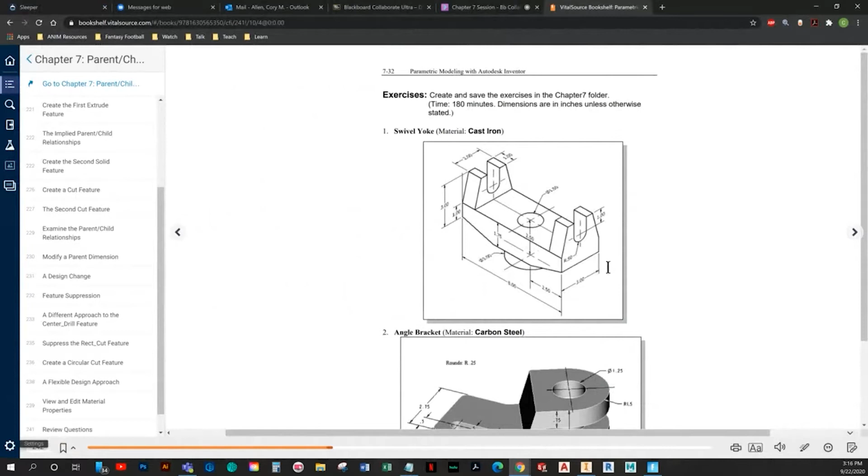Well, hello. So today we're going to draw Chapter 7's end of book exercises. Let's get into it. We'll draw the swivel yoke first.

And that's going to be in inches. So I'm going to start a new template.

And we're going to try to draw so that when we're done, our part's going to be oriented the same way. So I'm going to draw this profile here on the front plane so that we're looking at it just like in a book.

And as I always do, I'm just going to draw the size and shape roughly, and then we'll go back and get everything located right.

Now, if you notice, I'm making sure to imply perpendiculars, horizontals, etc. And I'm going to make sure this is vertically aligned as well. It saves a little time later.

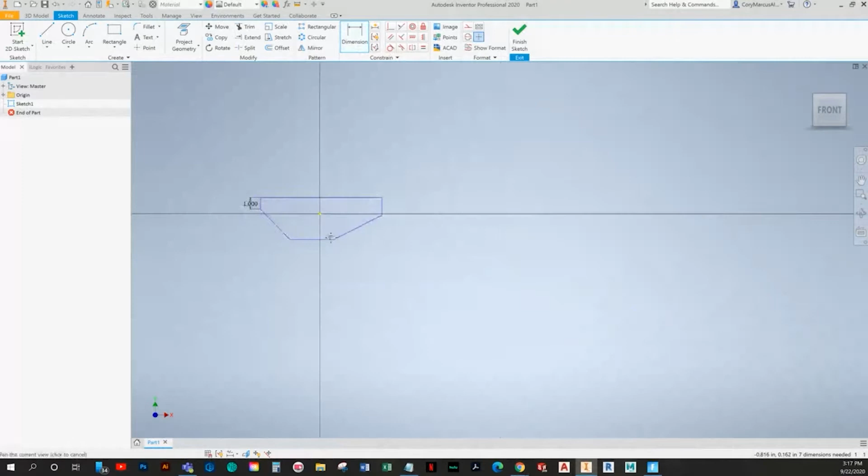It's 1 inch. I'm going to say that this one equals this one, so I don't have to bother putting in another dimension.

And 1.75 tall. We'll set this line to equal this one because I don't believe it had a dimension there.

Let's see. Let's put this part right here, the top of it, coincident to the origin point. Take the midpoint of it. Yep, there it is. And make it coincident.

Alright, let's see what else we need here. Okay, so it has to have a width. Yeah, 2.5. Okay.

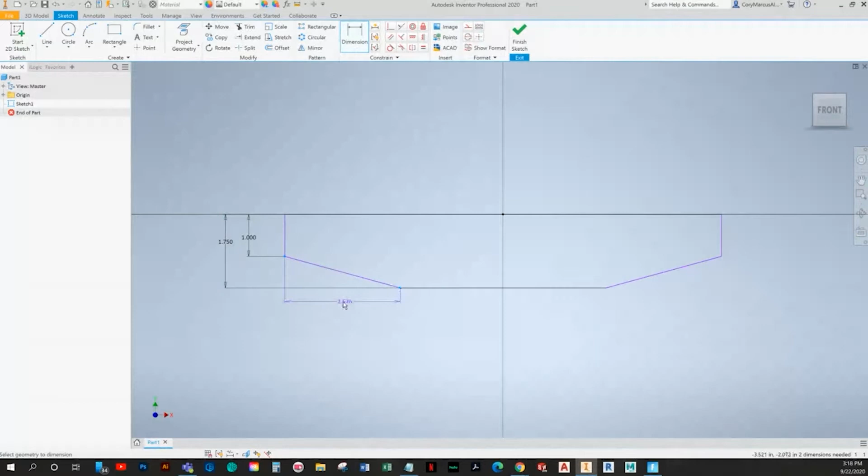And let's see, we're still missing something. An overall width, naturally. Alright, so it is going to be 3 deep.

And let's try drawing one of these features and then we'll mirror the other one. That way we don't have to do it twice.

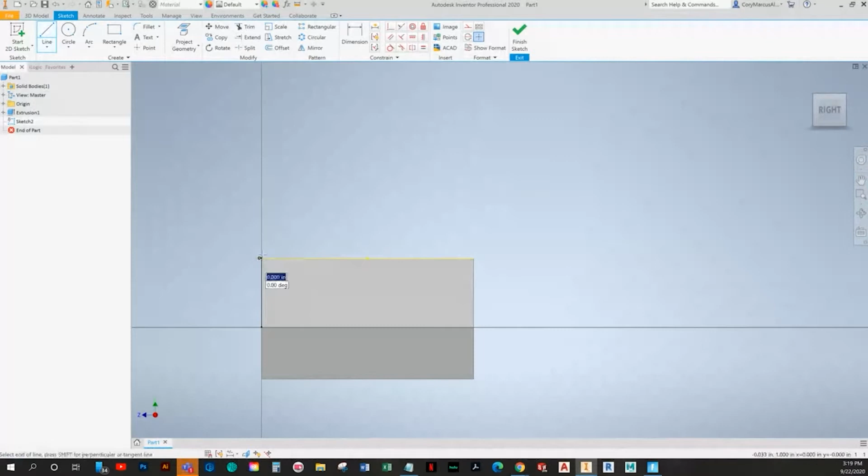I'm going to draw the rough shape. Oops, I'll try to hit the edges too. And for now I'm just going to draw a little rectangle. I'll put the round part in a second.

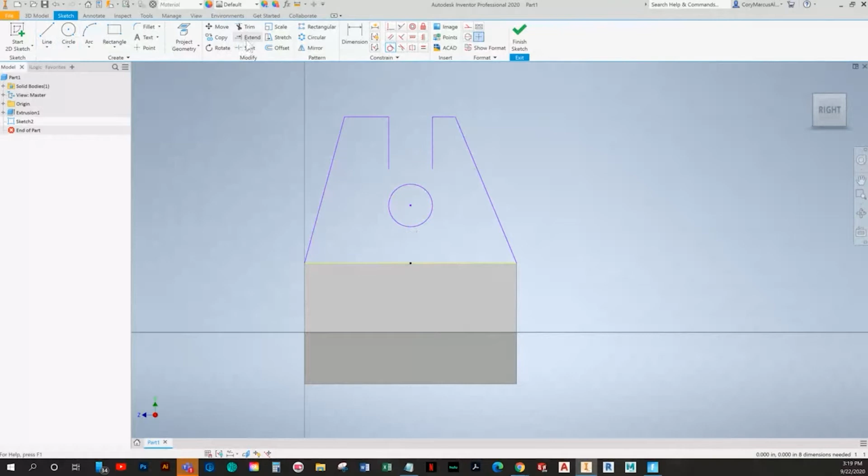Okay, so we'll make that vertically aligned to the center point. Make this tangent. And extend it. Trim.

So we know that this line and this line are equal. We also know that this one and this one are equal. And it is, I believe it was 1. Yeah, 1.

Radius of 0.5. And 2 wide up top.

Let's see, we're missing the overall height still. So it's 3 to this edge here. So we're going to project that edge.

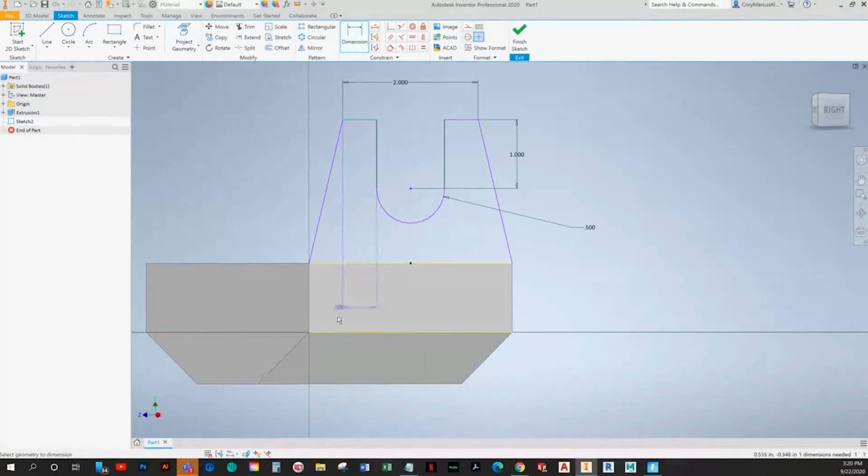And extrude it. And it's going to be 1.

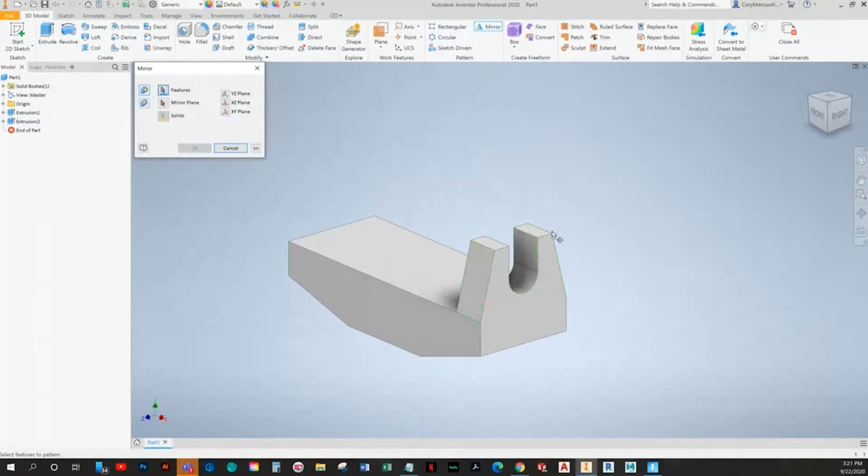Alright, so instead of drawing that same thing again, we're going to use the mirror tool, and I'll choose this existing feature, and then for mirror plane I'm going to choose this middle.

So obviously if you were not conscious in that first sketch to make sure your part was centered here, you wouldn't be able to use that plane, because the way a mirror works is it offsets to exactly the distance from that plane to this feature.

So if you're having problems, that's probably your issue.

And then we've got a hole of 1.5. And you know, instead of doing it like that on the face, I guess I could have used this plane since I made it conveniently in the right location before.

And I think it was 1.5. Yeah.

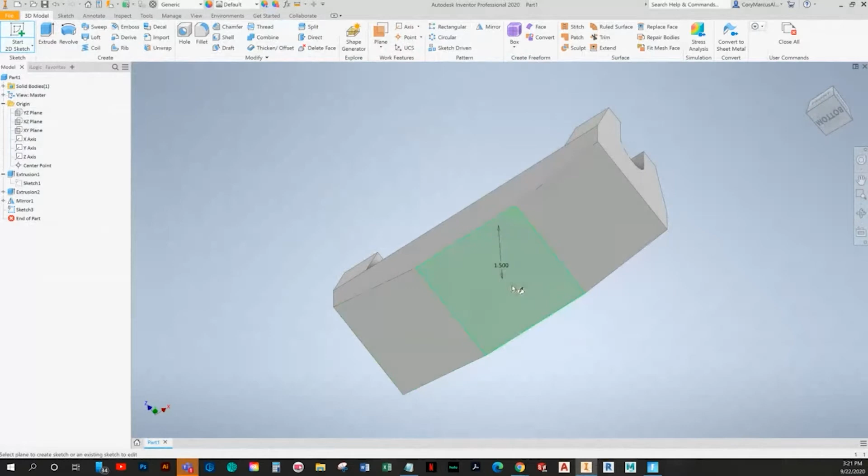And you know, I probably should have done the bottom circle first, so we're gonna jump over to that real quick. And it's 3.5.

And I'm just gonna move the sketch below it, that way I can extrude it all in one go. Okay, so...

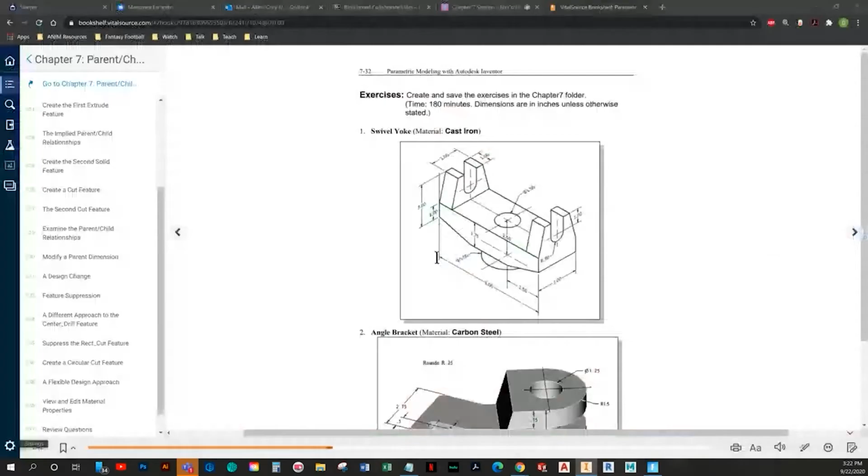It's 2.5 from the top of that face to the bottom, but I drew it from the bottom, so I'm gonna have to subtract 2.5 and 1.75, which is 0.75.

And then I'll take that other sketch and just do a through all cut. And there we go. Make sure that you change your material to cast iron.

It's called iron cast in this case. And there you have it.

Okay, so the next one is the angle bracket. It's also inches. And we'll do the top view first.

Be conscious of this view cube. A lot of times it rotates, but we're going to try to always make everything the same position that it's shown in the book.

Alright, so this one's a little trickier. I think I'm just going to draw it out in space and then I'll move it in position when I'm happy with it.

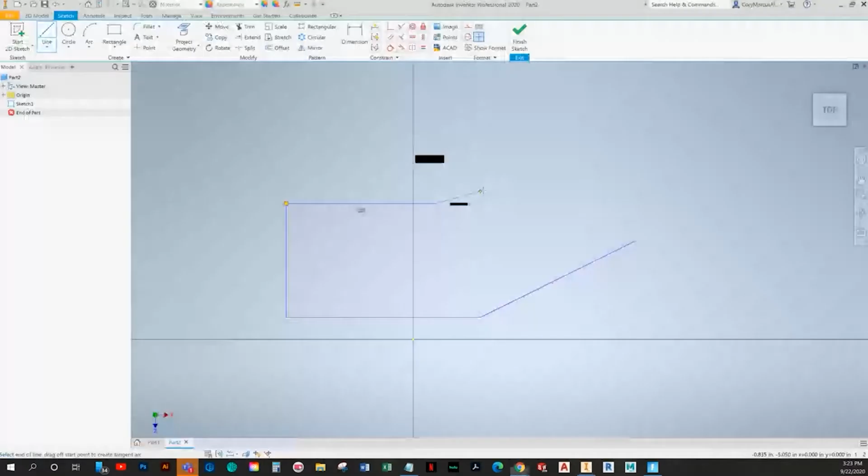Now looking at it, it appears that these edges are perpendicular, and same with these. So I'm just going to draw the box shape over here, and then we know that this line is parallel to that line. So I'll just put it here for now.

Let's say they're parallel. Draw a circle.

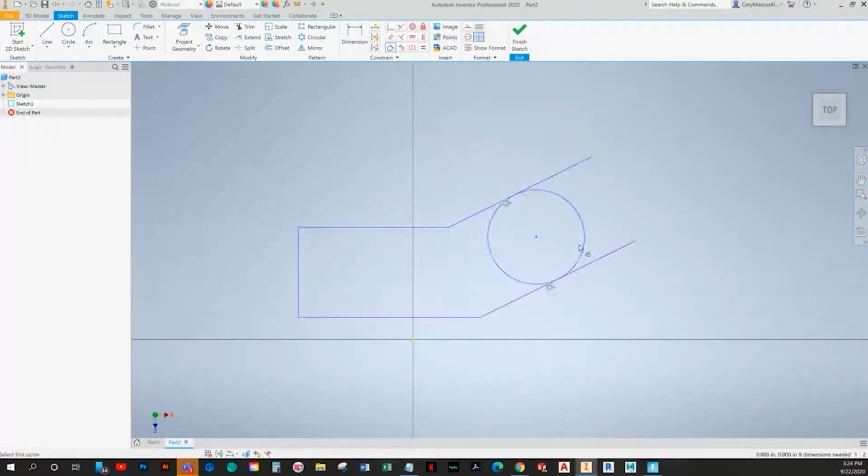And make it all line up nice and pretty. Okay, so this edge should be 3... it's 2.75 here. I'll draw the slot in a minute. It's 2.5 to the circle edge. Make sure this is a line dimension.

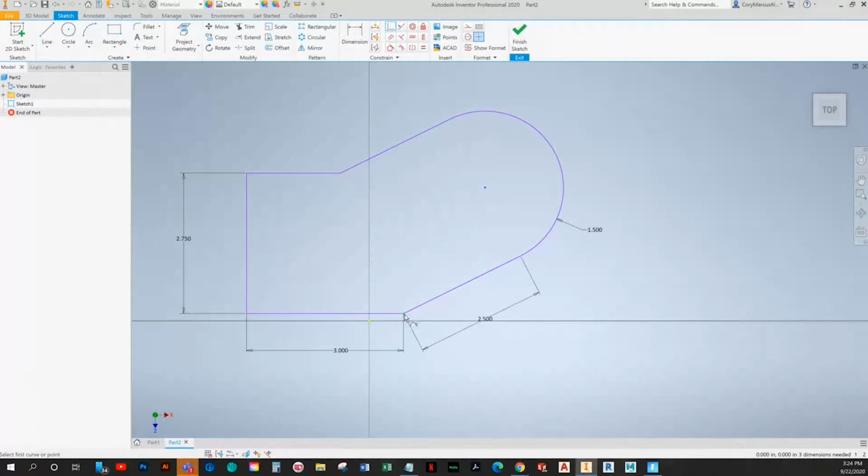1.5. That may be it. I don't feel like there's a great place position-wise to put this, so I'm just going to put a random point on a sketch on the origin, and that's fine. It's not great, but okay. And there's a 30-degree angle we need.

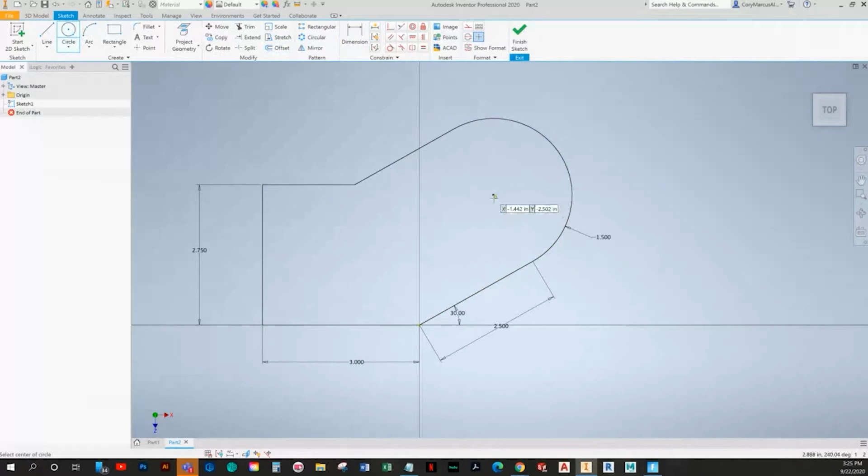All right, so we still need a circle hole, and I'm just going to draw a fresh one actually. 0.75 thick. And I'm going to draw on this face, that way we're aligned to the view. I'm going to project this edge, and I'll project the top edge too. There we go.

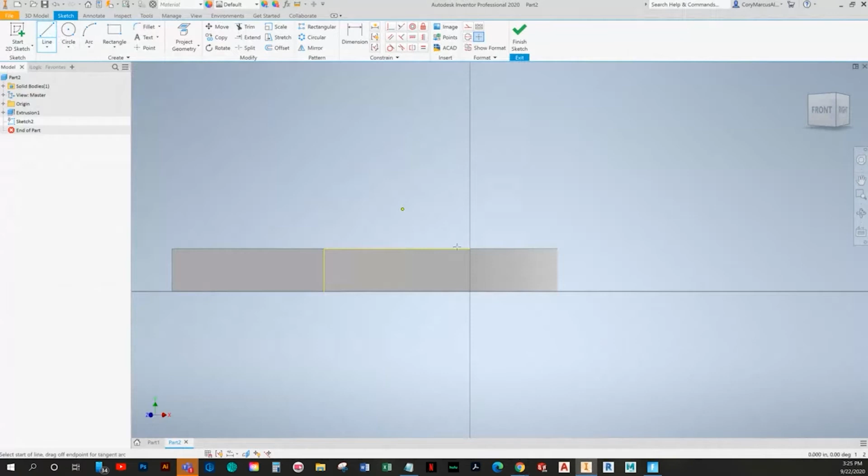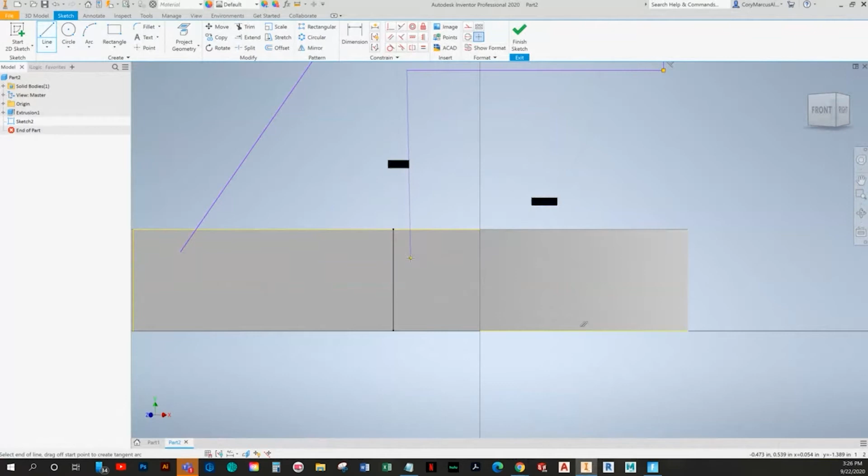Okay, so what we have is roughly a shape kind of like this. And I will go back later and have to cut out the circular profile, but it's kind of hard to get this angle right if you go the other way. Okay, and it just comes straight down, it appears. Hate when it does that. That's okay. Alright, I'm going to trim these.

And let's slap in some dimensions. Whoops, I dimensioned to the wrong spot. Okay, so from here to here is 1.5, and then from here to here is 0.75. It's 75 degrees.

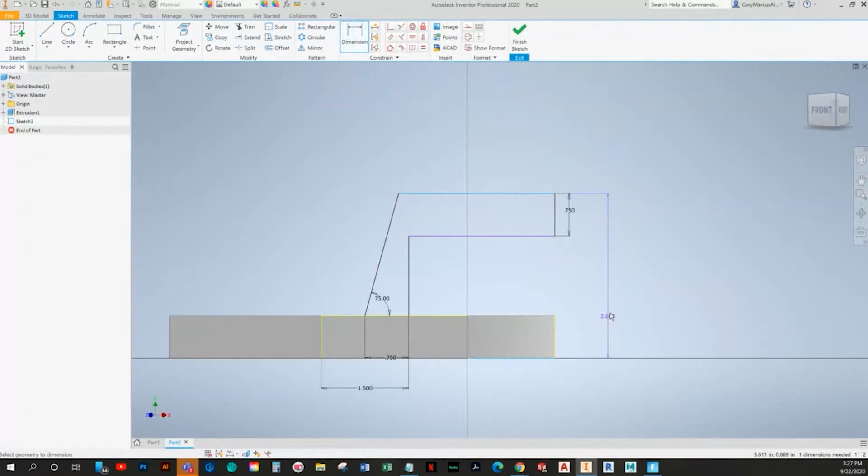I could set this to equal the other one, project that edge and do that, but that's okay, I'm just going to roll with it like this. I'm still going to project that edge though, to make this one collinear to that one. And then our overall height is 2.25. There we go, that looks more like it.

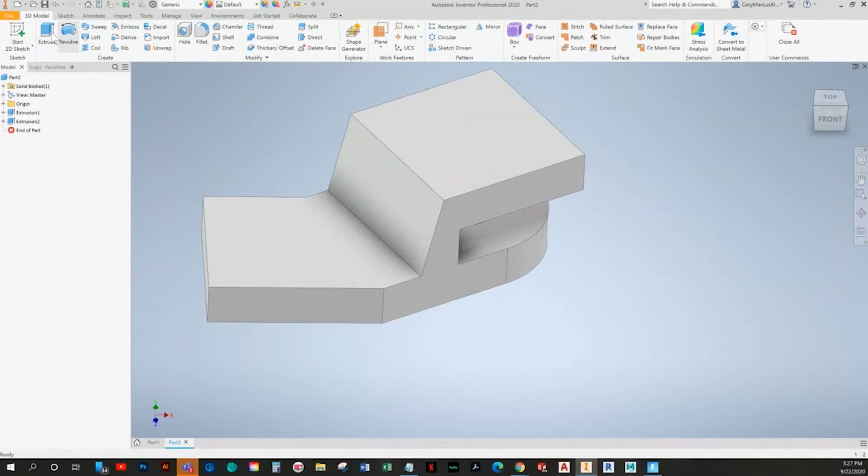Okay, and instead of trying to put in the number, I'm just going to choose 2 and choose the other face. So now it looks more like the actual shape we're looking for. And for the sake of being lazy, I'm actually just going to project these edges.

And in doing so, I can actually just extrude cut without having to choose anything. Oh, but I do need to project the edges of my square still. There we go. Alright, so now I can do a 2 and go to the other end of the face, that's this one right here. And that might be it.

Let's take a look. Oh, I need fillets in the slot still. I take that back. Okay, so we have rounds of 0.25. Well, let's go ahead and do the slot first, actually.

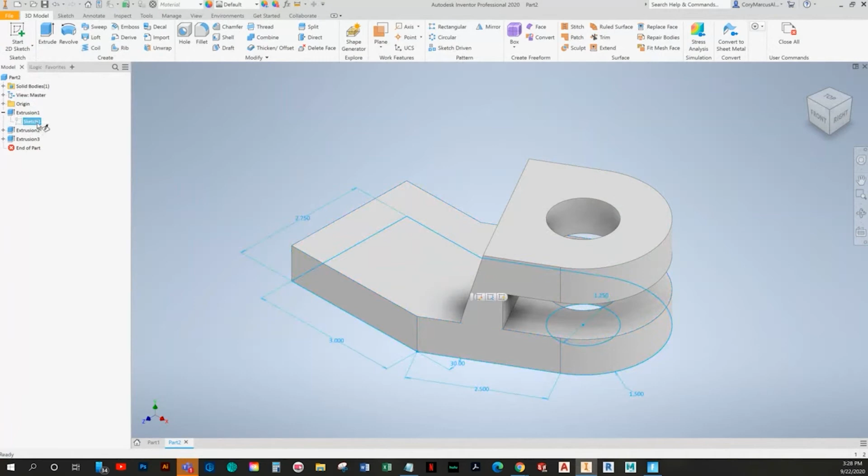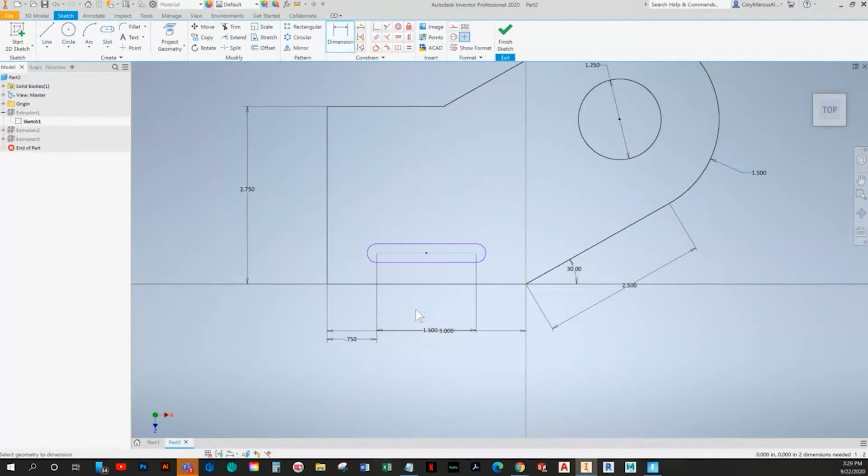I could have done it on the original face. I'm going to go back and add it there, actually. Let's see, where is the slot button? There we go. Okay, so 0.75, 1.5, and 0.5.

Well, there's another 0.5 as well. Alright, I'm just going to shift these dimensions around, get them a little more tidy. I'm sure you noticed they just jumped the whole time I was doing that.

And you may be wondering why it is that I did not put the fillets in on this sketch. It's because it's just sloppy. We're going to do a feature for that.

So it's 0.25, and it appears to be these two edges. It may be this one, but it's so pixelated it's hard to tell. We'll leave that one as an up-to-you-to-choose part.

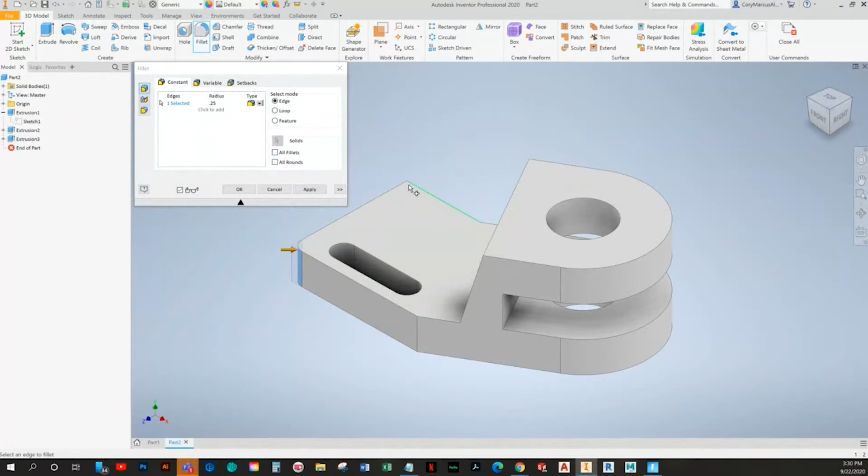Alright, and our material is carbon steel. There we go. And there you have it, the angle bracket.

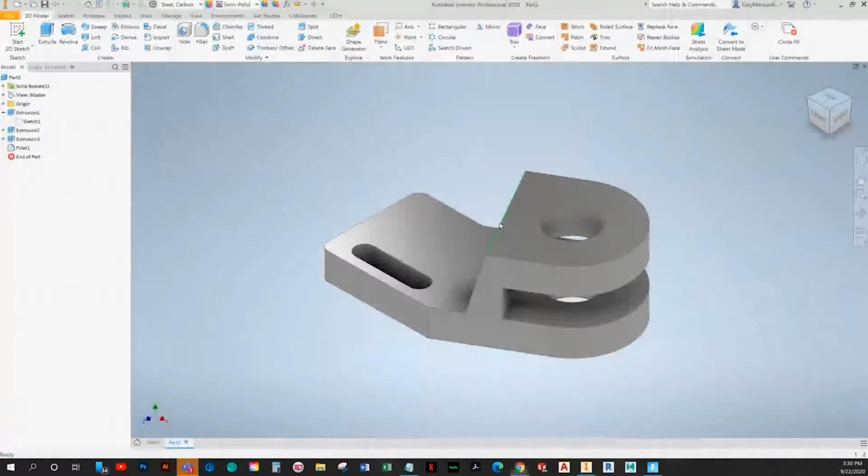Oh, this one looks fun. The connecting rod, it's inches. I mean, that's going to be a doozy, ain't it?

What I'm going to do is draw on the front plane, and I'm just going to draw everything. And then we'll minus these parts right here. And then we'll just extrude multiple times using the same sketch.

Because it appears that the intent is to have this rod attached to something, I'm going to use the center point as my origin location. And it's about 2 in size. I'm just going to go ahead and put in dimensions, and I'll trim and redimension them later, but I try to do things in a different way every time so you can see the different practices you can take.

Okay, and it's 6.5 from there. I'm going to ballpark that.

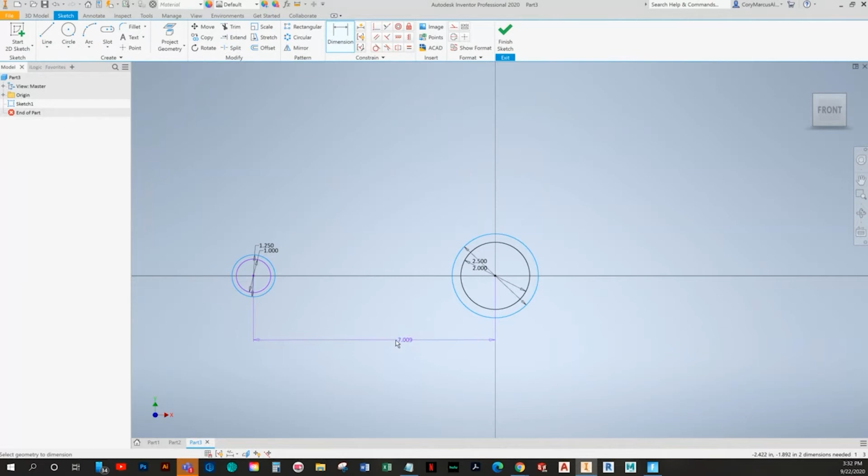Okay, I'm going to draw a temporary line. Well, I take that back. I'm not going to, it's fine. 6.5. I'm going to make these horizontally aligned.

So it's 3 between centers, but then it's 0.25 from there. So it's an overall height from this edge to this edge of 2.5, which conveniently means that it is tangent to this point of the circle because it's 2.5 diameter. So basically, I'm going to go ahead and draw some horizontal lines, make them tangent.

I'm going to go ahead and draw a line through the middle of this circle so I can trim it. When I do, it should delete these dimensions, but we'll see. It did not. That's okay. I'm going to go back and put radius ones just to make it match the book.

And I'm going to go ahead and draw these lines so that we can try to get that big old circle in there, the giant fillet. Technically, you could do a feature, but we're going to do a sketch one for this take. And that is 0.75. I'm going to dimension it to the circle so I can center it up.

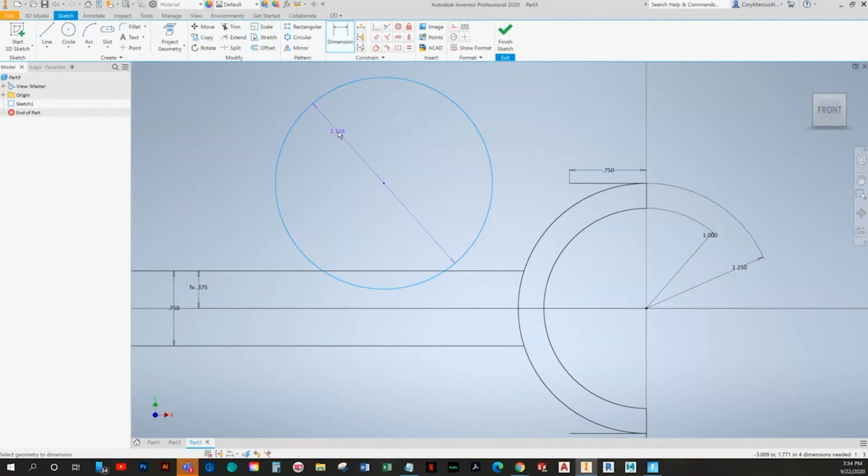It's a radius of 2. I'm going to set it to be tangent here and coincident here. Move this in so it's a little easier to see. And we'll do the same thing on the other side. We're just going to set it to equal this one.

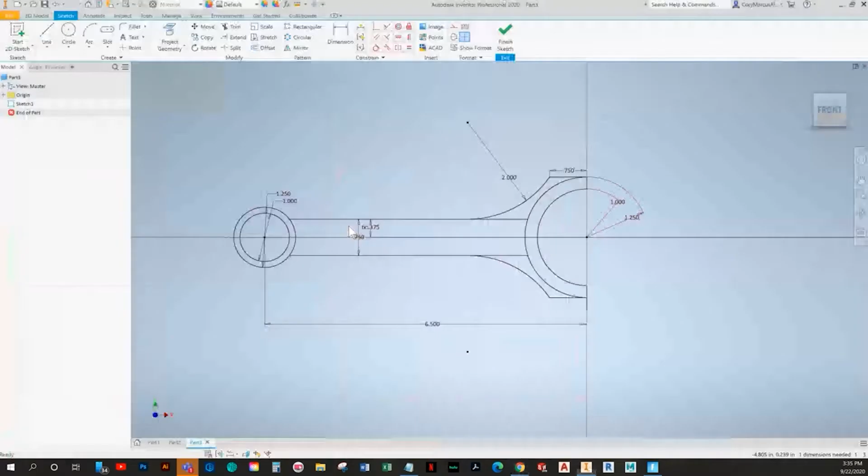Okay, so we still need this little cutout in the middle and these fillets. Well, these two fillets. So we'll do the fillets first. I'll set it to a radius dimension. Oop, I hit the wrong button. I believe it was 0.5. Yes.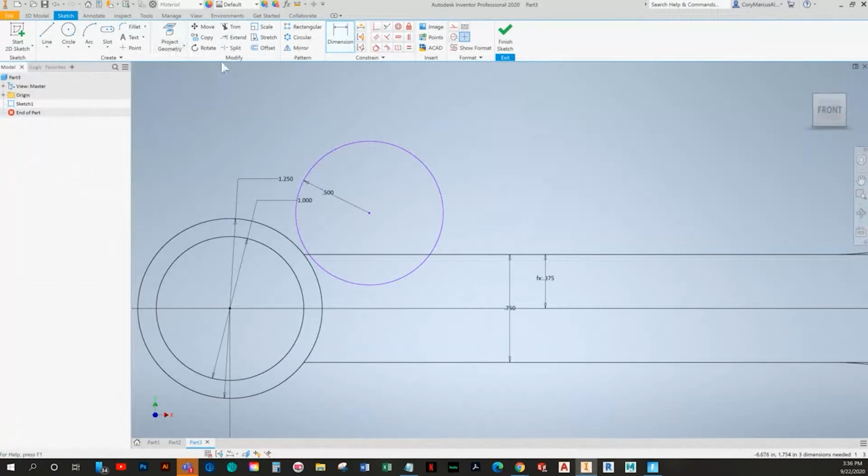I'm going to copy this one. And I'll set it to be tangent, tangent, tangent, tangent. Trim off these little edges. Trim these two, I believe. Yeah, and let's put the slot in.

So it's 0.75 by 3. And we'll make this center point horizontally aligned to that circle center so that we have it located properly. And let's see, it's 2 to here. All right, let's give it a shot and see if it comes out right.

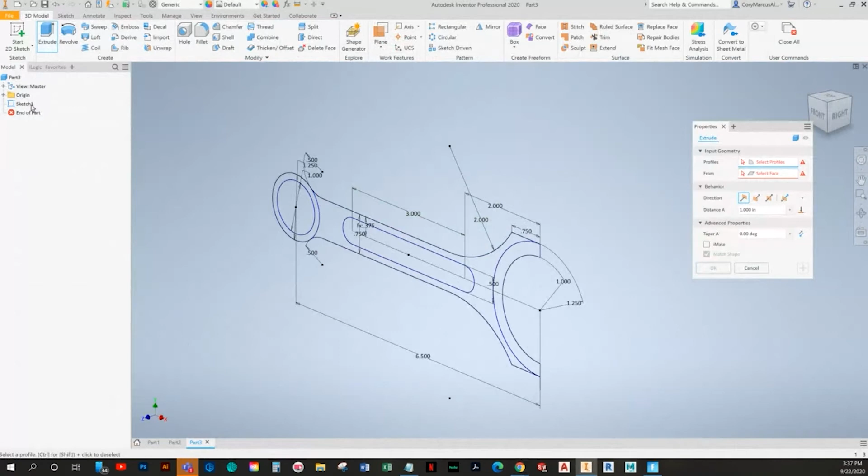I'd be lying if I said I drew these before. Oh, you know what? I have something not fully constrained. Let's see. What could it be? It's got to be a random line somewhere. Let's take a look at that.

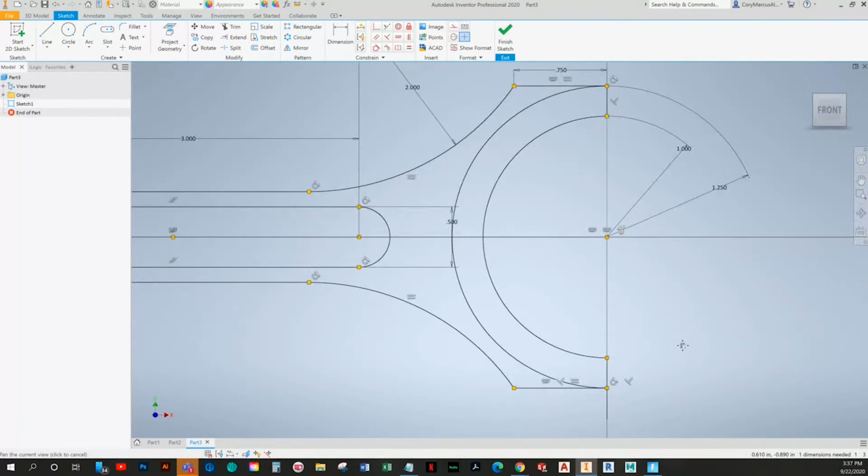Interesting. I'm going to set this one to equal this one while I'm here. But what is it? Oh, there it is. I'm just going to drag it in place. I didn't trim it on this side.

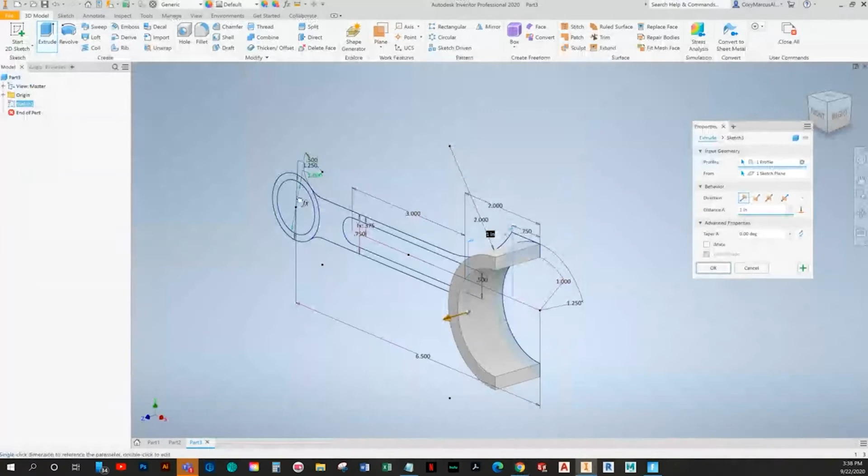Alright, so the overall width is 1 for the thickest part. I don't think there's anything else that's 1 here. Yeah, it appears this is 1 as well. Okay, so I'll grab these two shapes. Make it symmetrical for the sake of ease.

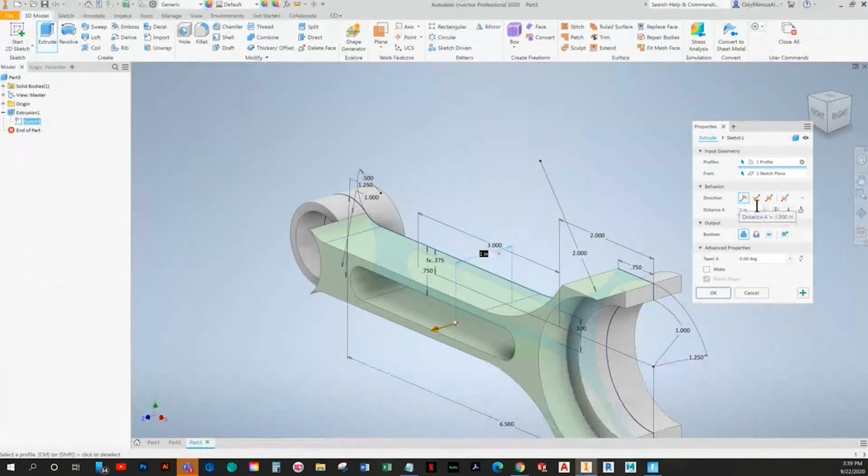Turn the sketch visibility on so you can reuse the sketch. And this part's 0.5 thick. Again, make sure it's symmetrical. Oh, I need to select that middle portion.

Alright, and then I need to have the overall thickness of 0.5 minus 0.125 for both sides. So I need it to be 0.25. Actually, I kind of goofed here. That's okay. So obviously I can't, because the slot's not all the way through, I can't reuse that geometry.

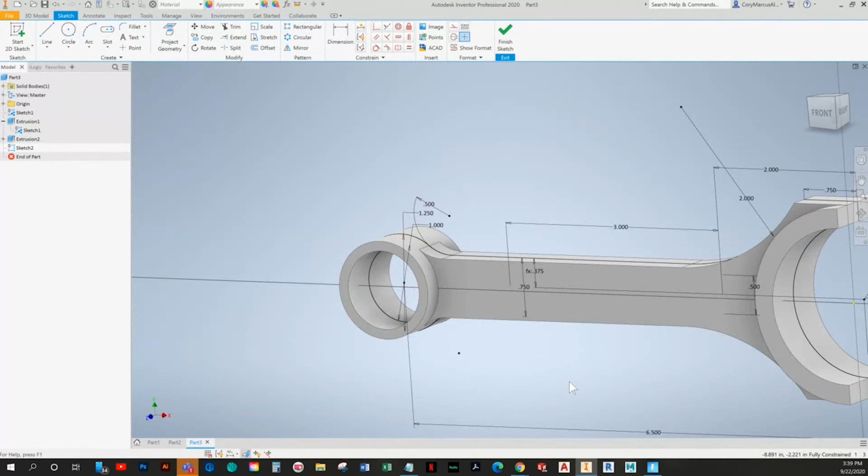So I'm actually just going to project that slot that I drew earlier, which unfortunately we can't see. So let's see if the slice graphics helps. No bueno. That's okay. I'll just go ahead and cut that out of the original just so we can keep it tidy.

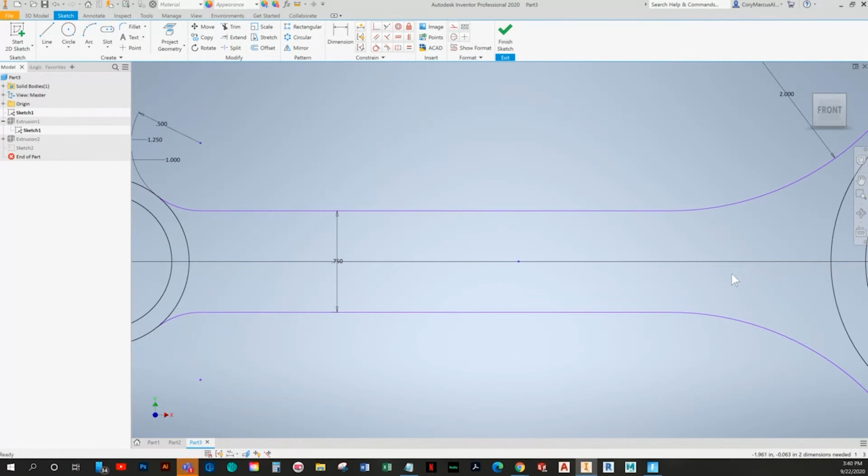I might have deleted something extra there. Let's look again. Let's just move this over here. There we go. Sometimes that happens.

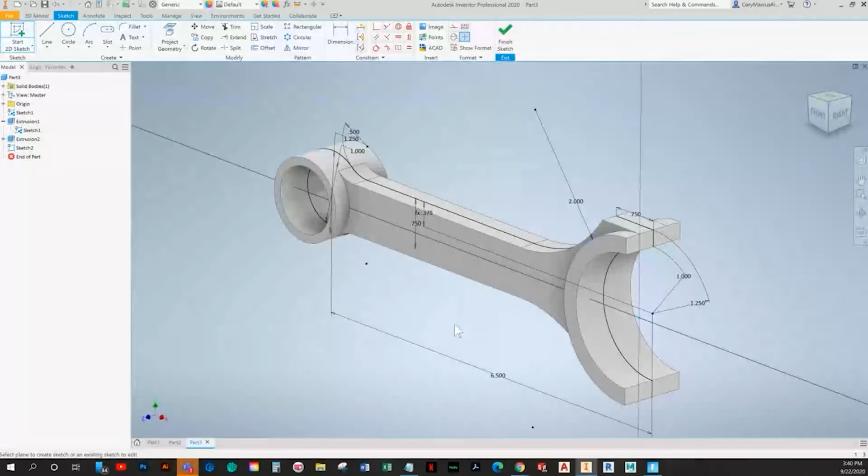Alright, so what we'll do instead is draw that profile and then we'll mirror it again, just like we did in the earlier exercise. Okay, so it was, I believe, 2 right here. Yep. Overall width of 3. Point 5 tall.

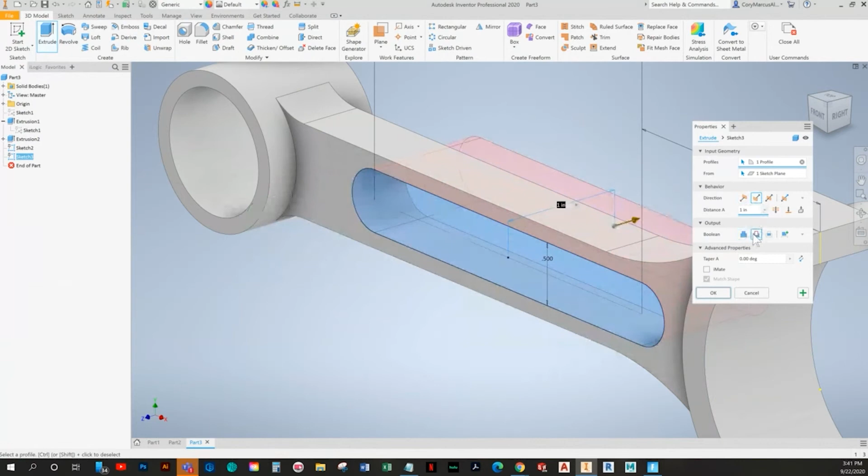Aligned to the center of the part. Okay, so I'm going to cut it 0.125 deep. Whoops, not through all. That's okay. And then I'm going to mirror that across what would be the front plane, XY.

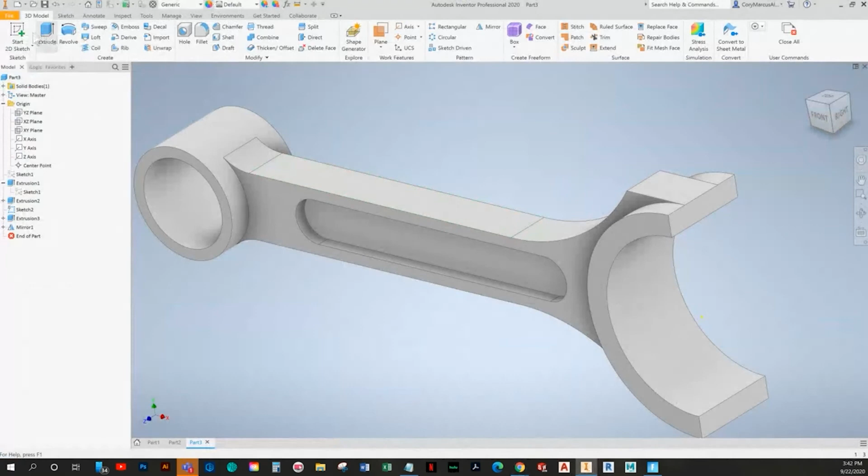And there's that. I think the only thing we need now is these little tabs. Let's make sure. So it would seem. Oh, wrong face. Okay, and ironically, I'm going to mirror it again too.

I'm not going to draw it down here. I'm just going to mirror it across the top plane. And it works smarter, not harder. Just going to draw some vertical lines and a circle. Trim off the excess. Make sure this edge is projected, of course.

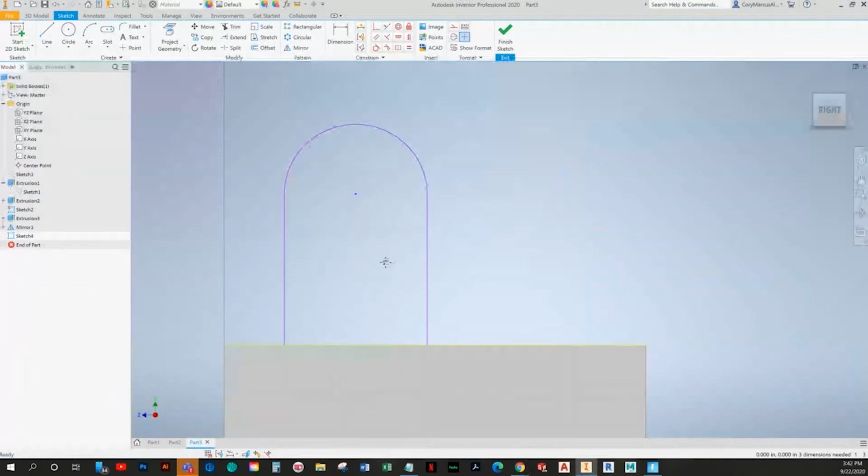It's 0.25 from here to here. It needs to be lined up vertically, the center point to the center of the part. It's a radius of 0.25 and a diameter of 0.25.

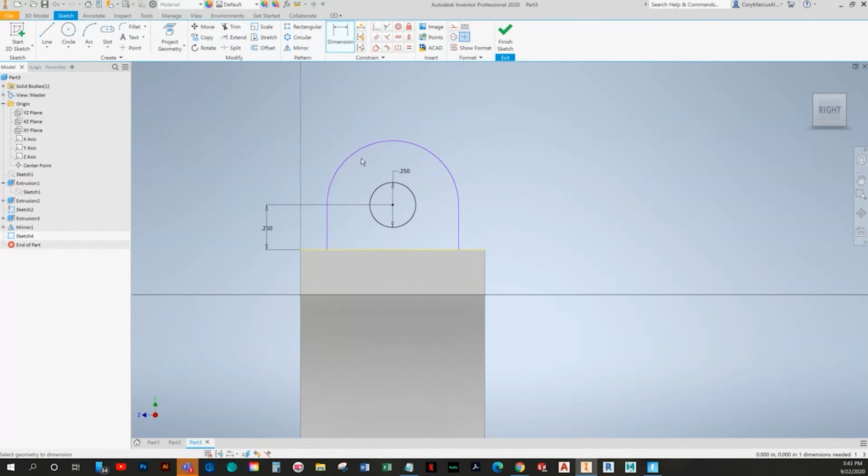It's 0.5. And then let's do another mirror to finish this up. I'm going to choose that feature, the top plane, and hit OK.

And the material is carbon steel. All right, the tube hanger. It's inches again.

Let's draw it on the right side, that way it's lined up. This is a terrible front view to be looking at this direction, but let's keep to the trueness of the book. And we're going to use the center point for our origin center because that's just a great option. Anytime you can put a circle in the middle, I bite at the bit for that.

Okay, so it's a diameter of 3, diameter of 4.

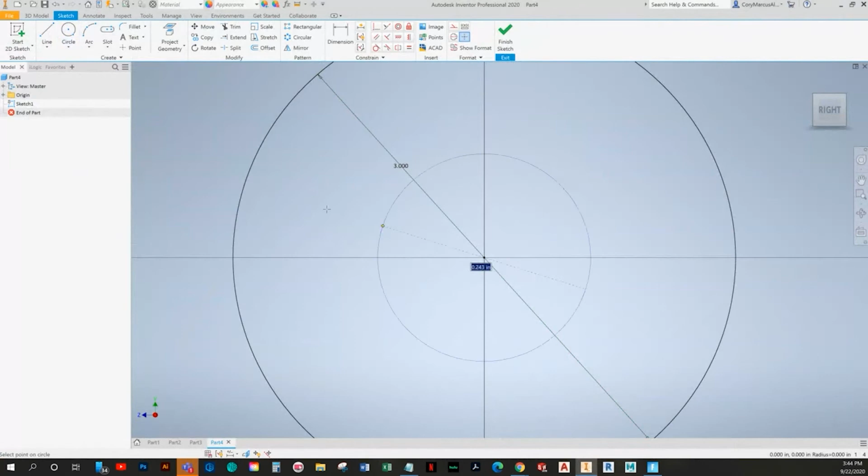Now this one, it's hard to tell, but that line, if you look at it, it's parallel to this line, and you know that this line's horizontal, so that lets you know that this bottom line is also horizontal. So we're going to draw a random horizontal line, and then I'm going to draw straight up, and then make a slant that I'm going to make tangent to the top.

So I'll get it kind of close to it. Alright, so tangent, tangent, tangent, tangent. Let's put a height in here, 2 times 1. Trim.

What am I looking for here? Oh, width. Okay, so 5 wide.

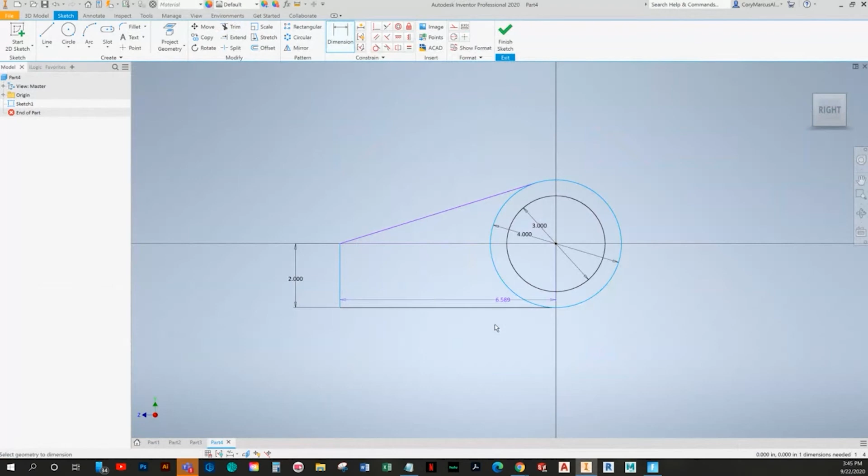Cool. Okay, so 1.5 both ways. I'm going to turn the sketch visibility back on so I can reuse it.

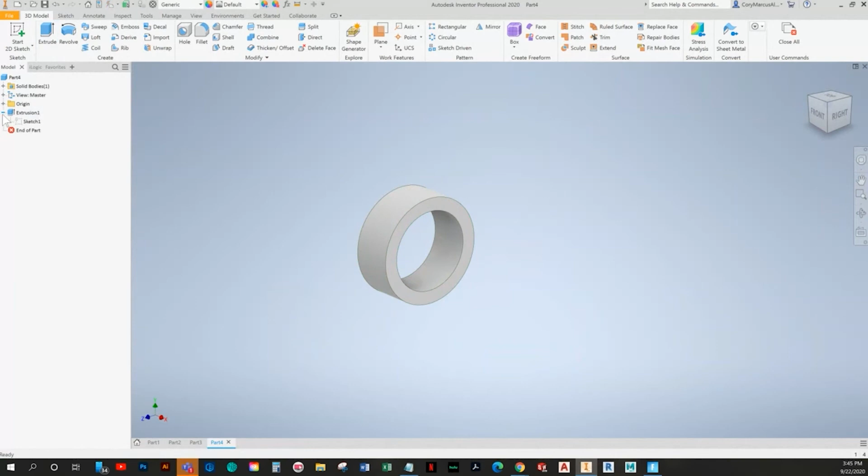I could also hit share sketch, but it's the same concept. What's the point? Okay, it's 0.75 thick here.

And I'm going to turn that sketch visibility back off so it's a little easier to see. Draw on this face here, and I'm going to go ahead and project the edges. I'll just click the face.

And it looks like we'll have pretty basic shape, just some more horizontal lines. If you don't want to snap to these edges, just choose to rotate the part and then draw.

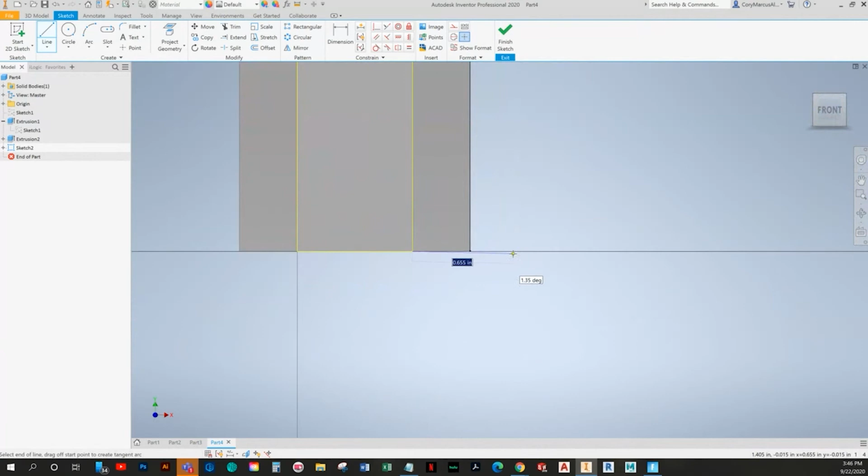Draw a circle, which is going to be tangent. We'll pull this line out a little bit so it's easier to trim. Same here.

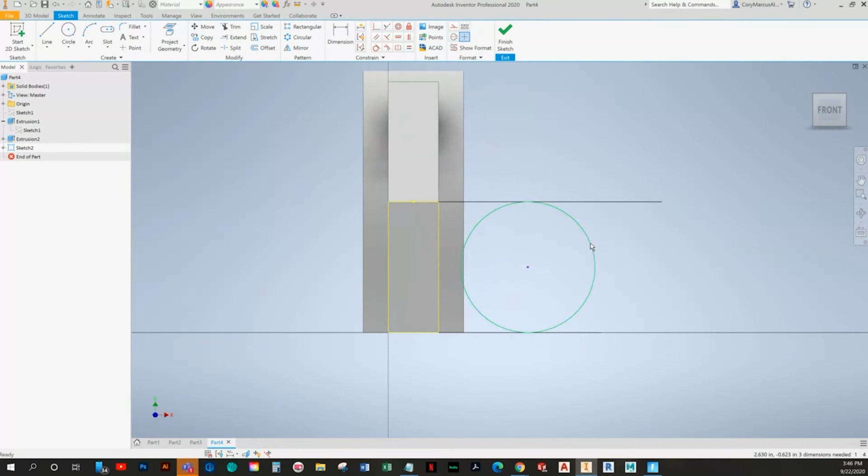Okay, and it's too wide from the outside. Whoop, bad clicks.

And you may notice I didn't have to put that R1. That's obviously because it's tangent on both ends, and you've already got a height given of 2.

All right, and then we're going to extrude it 1 deep, and then apply our material of aluminum 6061.

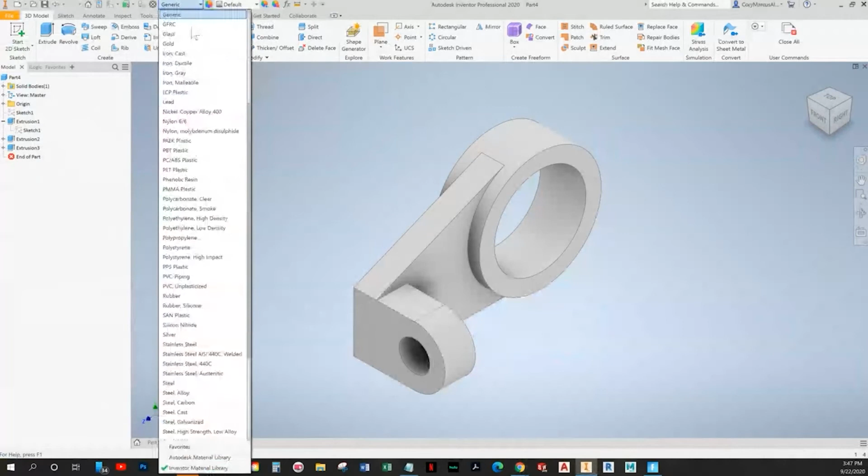All right, well, that's that guy. Here's the last 2. Millimeters.

We'll do a top view of this one. Rotate your cube when it inevitably rotates for no reason. And I'm going to draw this as vertical, so this will be tapered downward.

I believe, yeah, so we've got perpendicular corners for these 2 and these 2. Not very to scale, but you get the idea.

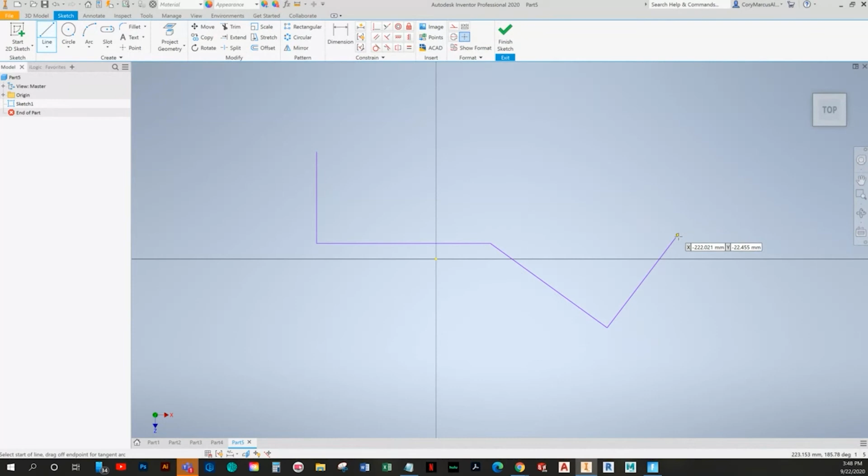Don't like whenever it shows us projected edges in 2 spots. I don't want it to try to make relationships I may not need, you know? That's okay. It didn't get to perpendicular, but that's fine. We'll work it out.

Okay. There's not really a great edge choice again, so I'm just going to go very generic, and I'll make this point coincident here. And then we'll just go from there. It's fine.

60 wide, 75 wide here, kind of weird. Perfect 45 degrees.

115 on this edge. 60 for this one.

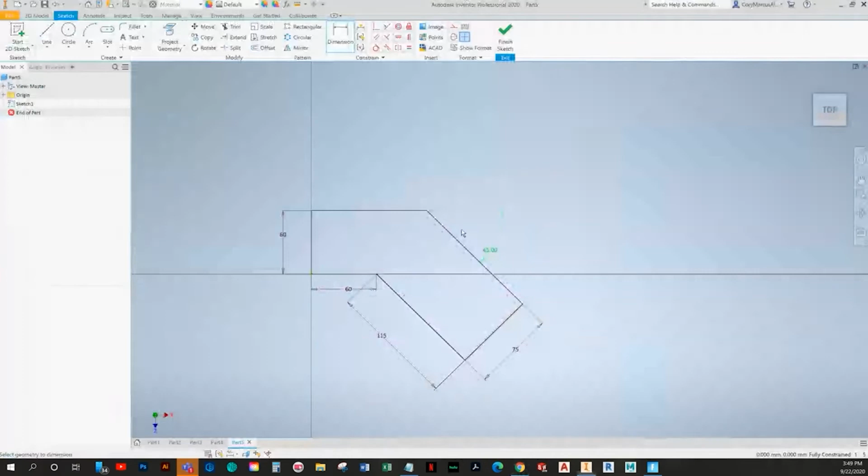We'll apply the fillets afterwards, that way it doesn't complicate the sketch too much. Usually when you throw fillets in on corners that you're dimensioning to, it's a catastrophe, needless to say.

I'm not going to draw this outer slot, but I'm going to draw this inner one. Well, it's a little large, I think, but that's okay.

Okay, so making a line dimension to it. The slot width is 50. It's 30 to the center from the edge.

And the book specifies here that, I mean, it's kind of really not very clear, but it wants you to dimension this edge to the center and then say it's 75 divided by 2. You can tell that by this little sigma, the red sigma. That's basically a symbol for equations in SolidWorks.

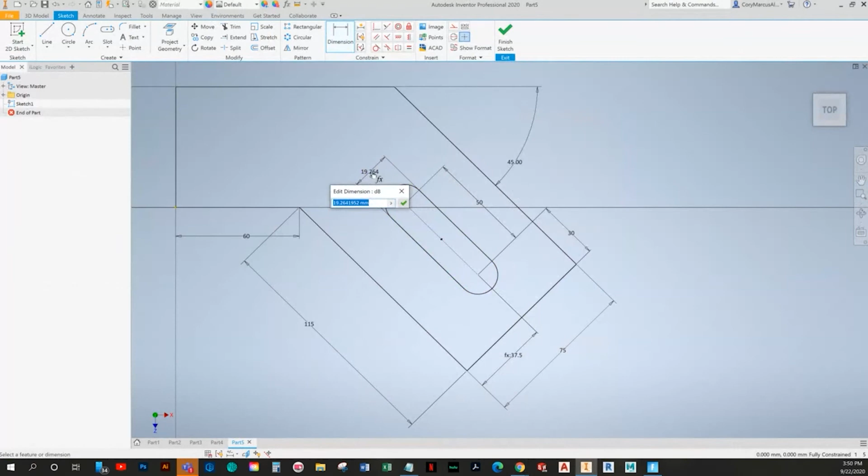And whoever drew this clearly forgot to make it more Inventor friendly. But that's okay, that's why I'm here. We'll take care of that.

It's gotta be a thickness, 30. Okay, so it's 30 thick.

I'm gonna go down just because. We'll just go ahead and draw the circle on the side, because why not?

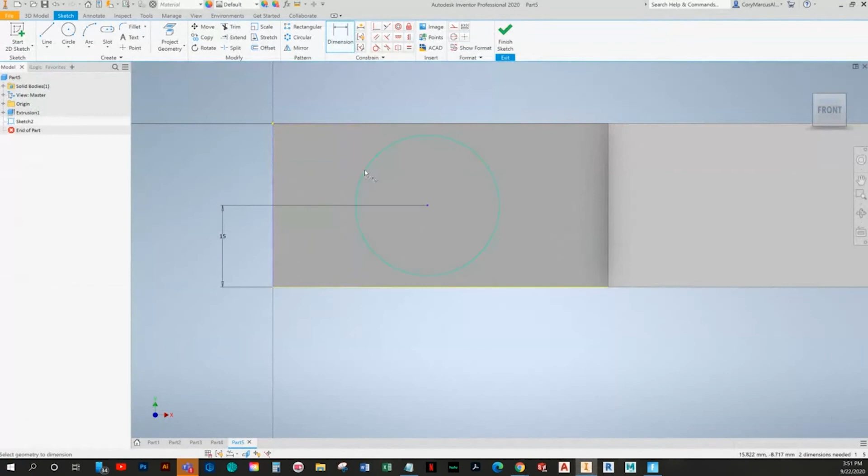It's 15 from the bottom, 30 from the side, 15 diameter.

We can't tell how deep that hole goes, so you have to assume it's through all, because otherwise it would have given you a depth.

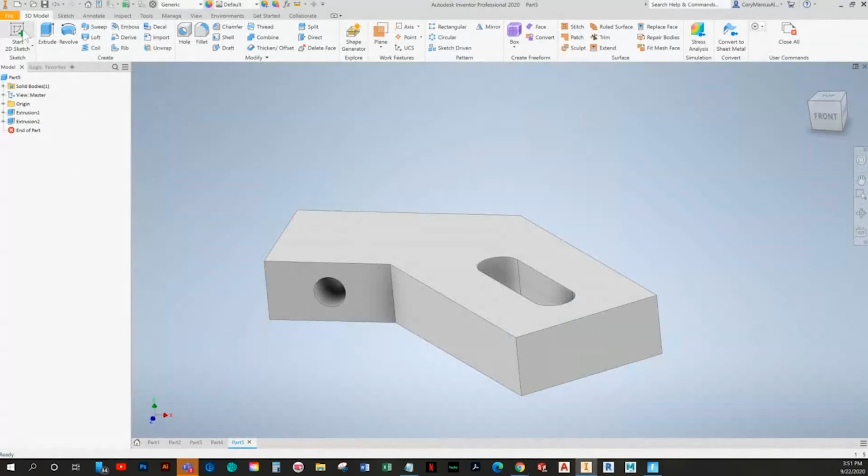Let's add that extra part of the slot here. Instead of trying to draw it all, I'm going to project the face and then see if I can just offset it. Yeah, it's a lot less work than drawing it again. That's why I gave the 10 dimension, so that you could just offset it.

It's a heck of a lot easier than doing it twice. And it's a depth of 5.

Alright, so our fillets everywhere are R10.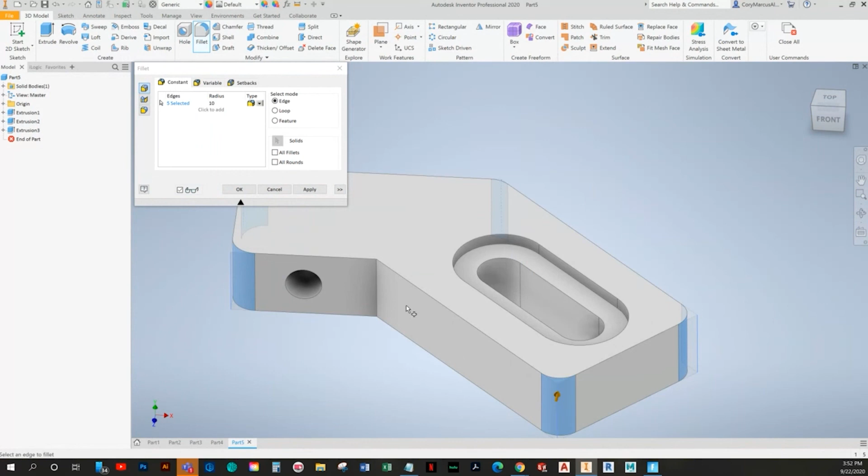So we got this edge, this edge. I'm assuming it's every corner. Let's take a look and make sure. Okay, so that one appears to have one and that one. So yeah, it's all corners.

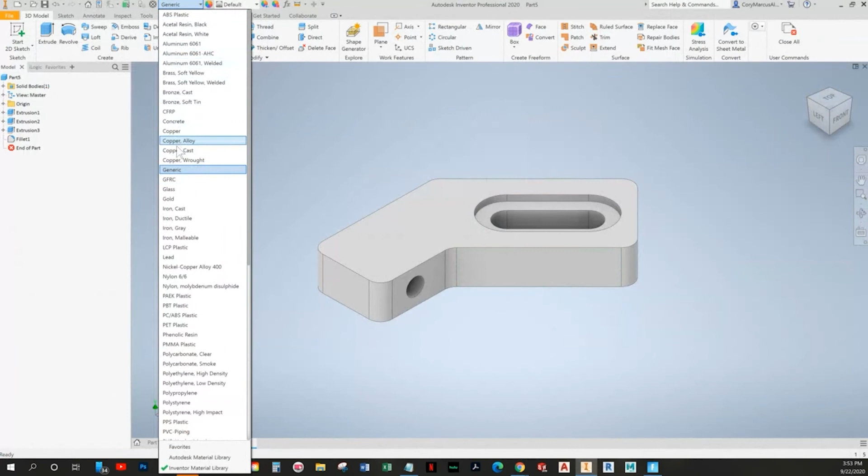Yep, that appears to be it. Let's put brass on it and call it a day. Let's do brass soft yellow, since it's not specified. You know which kind of brass it is.

And we're going to jump back into inches for the last one, the incline lift. We'll draw on the front view.

Draw some horizontal and vertical lines. That was a terrible example of that.

Alright, and then a slanted line. It appears that it goes a little bit lower than this part. And it also appears that this line is vertical and parallel to this line.

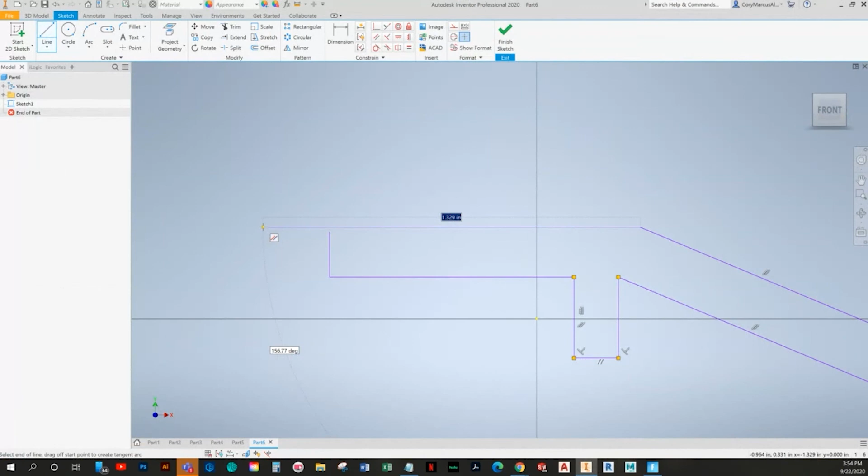And I'm just going to draw it horizontal, and then I'll just extend to make it meet and trim the excess.

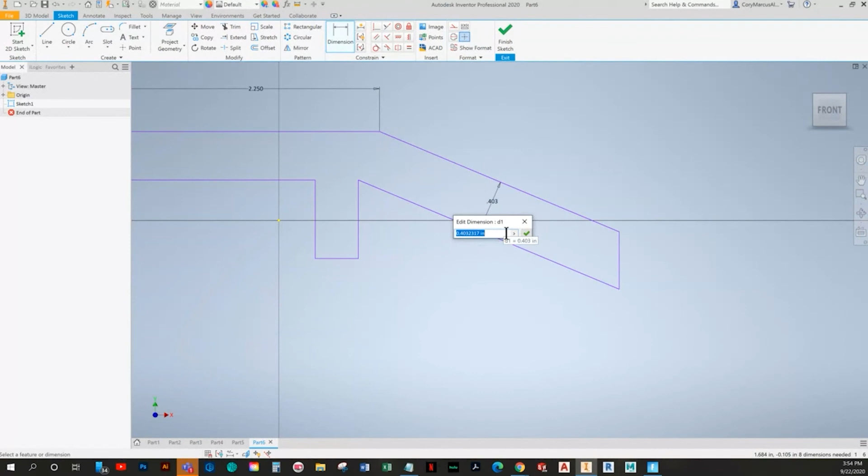Okay, so it's 2.25 here, 0.5 from here to here, and be conscious, if it doesn't say inches, that means these two lines you drew are not parallel. In that case, it would show degrees, and you need to make them parallel and then apply the half-inch thickness dimension.

Pretty crucial step. All right, these are both 0.5, this line and this line, so I'm going to set them to equal each other.

It's 0.75 from here to here. Overall width of 5. Oh, bad click.

And we'll squeeze it right here.

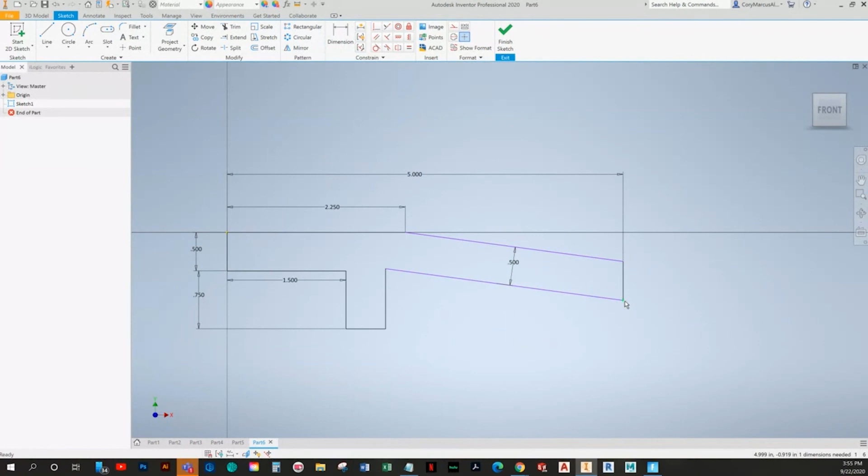You know, I forgot to locate and reference the origin. Let's just say, how about this top corner? We'll make it coincident to the origin point, because it doesn't appear that we have a good spot. I'm just going to tug this down and then put whatever we've got here to tie it in.

It's 1.5 tall from here to the bottom point.

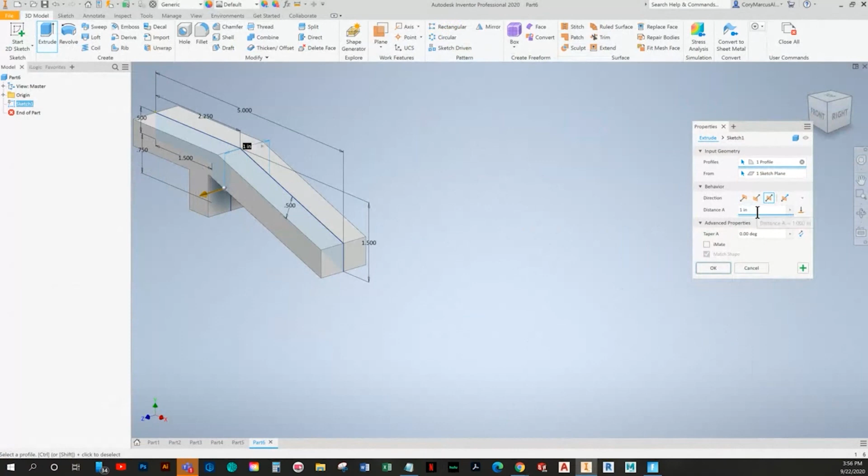Alright, so let's extrude 3 both ways. Not 63, just 3.

I'm going to go ahead and draw this part first. I'll project the face. I'll draw that slot. And then our traditional little set of vertical lines in a circle.

Now, if you notice, it extrudes all the way through both. So you really need to make sure, and just to be clear, I'm going to delete this edge. Well, unfortunately, I can't delete it without deleting the other edges. I'd have to delete the whole projected face. So I'm going to project this bottom edge, because it has to cut through the furthest extent of the side.

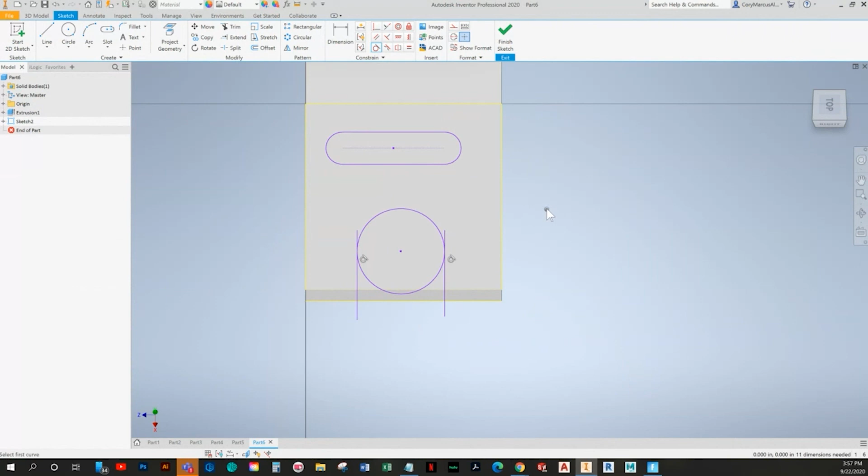I'm going to trim, and it's 0.75 here to here. 1.5 wide slot.

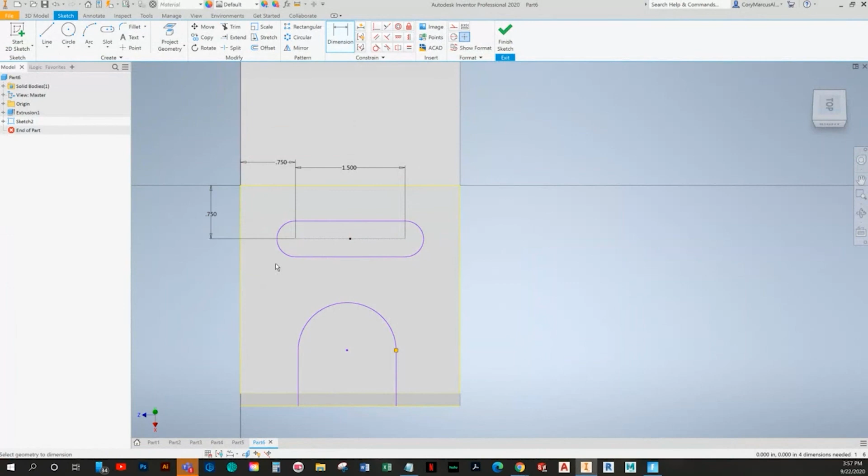0.75 to the center, and 0.5 tall.

I'm going to make this circle aligned vertically, even though it's horizontal that I had to choose, to this one. And it's 1 wide. So 2, whoops.

Okay, I'm using some bad math here, so I'm just going to dimension the width of 1.

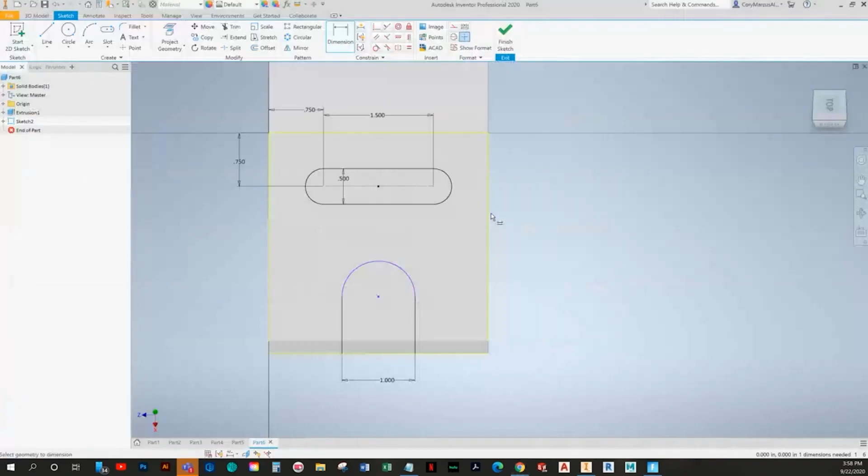And sometimes you may notice it had a coincident here but not there. It's one of those times where you may just have to turn them on and off to see the right thing. So now I'm just going to finish aligning it, give it a height of 1.75 from the top edge.

Cool. Okay. Let's extrude these two shapes.

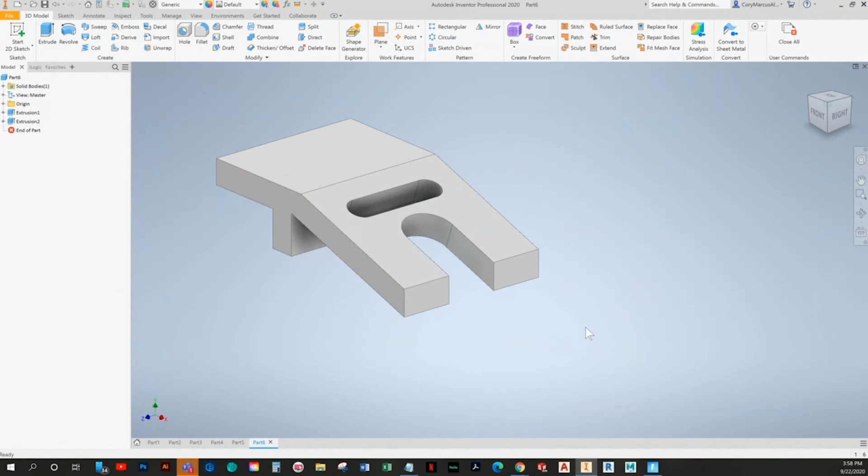And I'm going to draw on this top plane since I made that point in the right spot where I could just draw and it still be aligned to the top face.

Okay, I'm going to set these circles to equal each other. Make them a little smaller.

Bad dimension. I did tangents on both. It was inconvenient. I need to make these vertically aligned as well.

It appears to be 0.5.

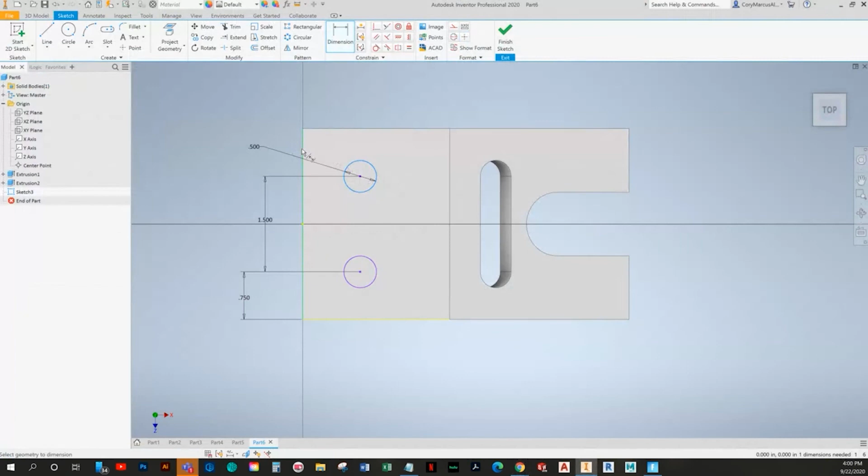All right, let's do a cut through all.

Yeah, that appears to be it. Let's put that material on it. Steel, mild.